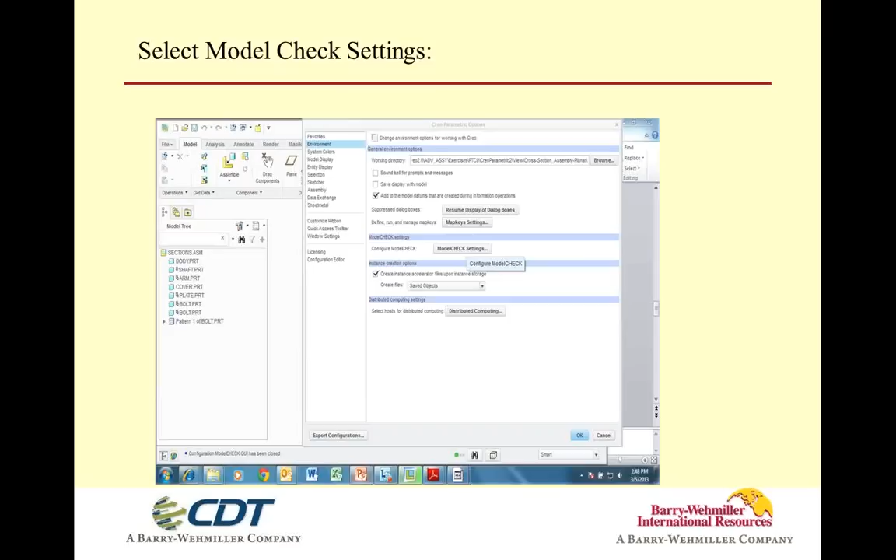Back in the days when I started off, which was about Rev 4, Rev 5, we had to pay for ModelCHECK, and it came into fruition in production build about Rev 9, and that cost about $10,000 to $12,000 - quite expensive for one license. So now it's free, and what I like to do is promote this side of it because it is a wonderful tool to check things such as the models.

And what I'm talking about is the integrity of the models. First of all, are there buried features? Are there features within features? Are there misspellings in words? So those are some of the things that you can actually do.

You can even take a look and see if the constraint to an assembly is correct or not. It looks at all three kinds of conditions: the drawing, the part, and the assembly. And because a parent-child relationship exists, you can get ModelCHECK to actually report these.

We have what we call an MCC file, and a configuration file that we have to set up. Those files are what ModelCHECK actually operates from relative to its characteristics. Understanding some of the rule checks and how to actually launch this is something I want to get into relative to ModelCHECK itself, so these are some really interesting things we're going to cover.

Jump over here into the PowerPoint to get into where the actual conditions are. So we're looking at where the ModelCHECK settings are in Creo 2. Now in Creo 1 and below, we have a totally different configuration setting. It's kind of in a pull-down bar in one of the tabs, and you can see it.

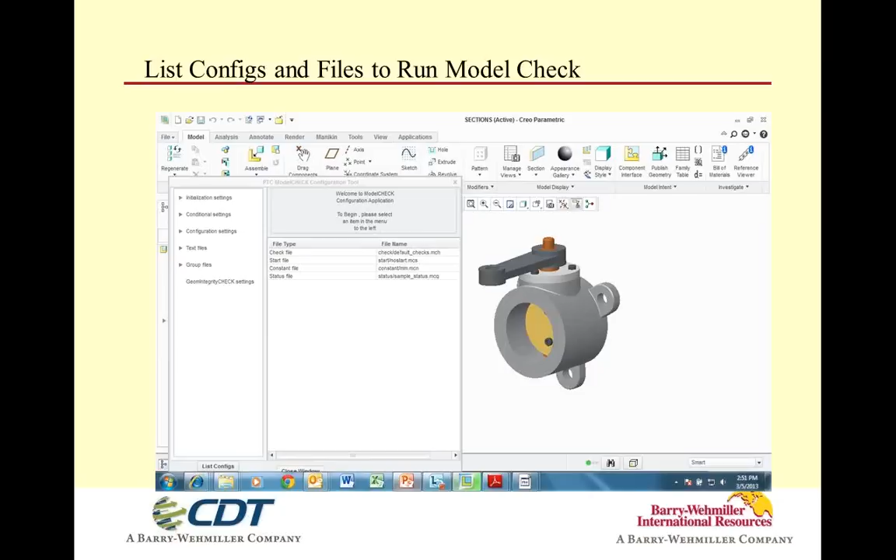And then we're going to actually run like this. Take a look at this. As you can see, we have initial settings. This is what they call the config.init file for ModelCHECK. So you're going to have certain conditional checks.

You're going to have a check for the start file, a check for a constant file, maybe a library or whatever, and you can check whether it's millimeters or inches you're looking at for units, and some basic things there.

And then we get into conditional settings and configuration settings, text files, group files, and geometry checks. What I mean by geometry checks is like circular references, or a buried feature where you have a hole within a hole. That's considered a buried feature, so you avoid machining errors when you go into the manufacturing world.

I highly recommend using ModelCHECK on both the manufacturing side when the model goes into manufacturing, and also when I check it back into my PDM system. So those are some of the things I really like to see.

The other thing I really like to do is use ModelCHECK for my analysis people, because one of the things you can do is check for material. You can check to make sure the mass properties have been filled out properly, and you can get into a lot of those characteristics that should be set up front with your start part, start assembly file, or start drawing file.

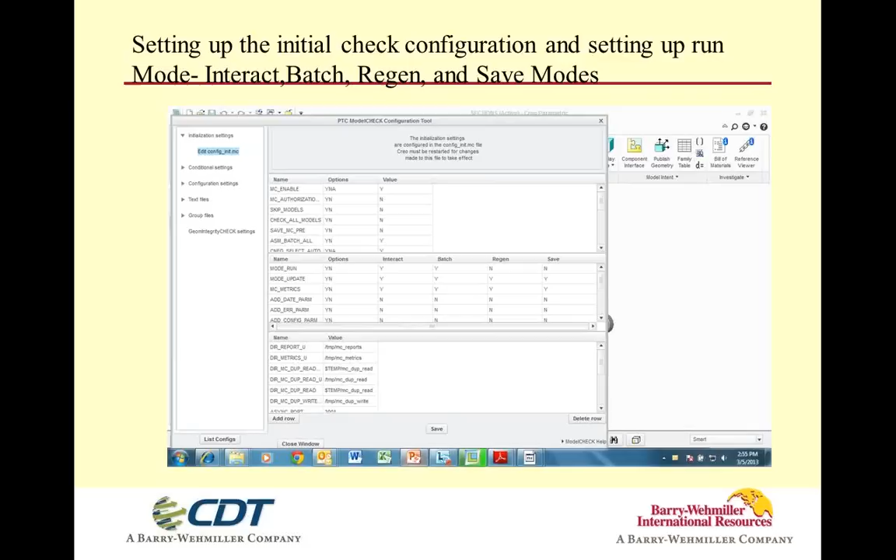And this is something that's free to everyone. Today when I walk into a company, I don't see many people saying 'oh hey, I'm running ModelCHECK and finding errors, I've got buried features in it.' You just don't see it, it's just not set up. So I thought it would be a great topic for discussion today in this webinar, because it's free. It used to cost us big money, so I highly promote it, and it's lovely.

If you ever want to get into some mentoring on why things are happening or what the situation is - can I check for this? I've got a whole long list of these parameters, and then some that are not even published, that you can actually check for. So these are some of the things that we like to do.

When I get back in here, you've got basically modes of action - you've got interact, which is this mode right here, and you've got batch. Let me talk a little bit about interact. It's called interaction, meaning it'll actually check as I'm regenerating and moving through that particular file. So it's kind of working with me as I'm building that model up.

And if I run across anything that is not a corporate standard - this is where I really like ModelCHECK - because I can incorporate a company standard to check for this in ModelCHECK and either error for it, warn for it, and actually report it.

So why would I want to report this? Well, one of the big things that happens is you have a PDM system called Windchill, and you can take the amount of errors that you see within ModelCHECK and report it back to the PDM system so you can maintain it by username or by user number and see what the performance is. So when you have a total list of what you'd like to see in your standards, when you create these parts, your vendors know you've got good parts to begin with.

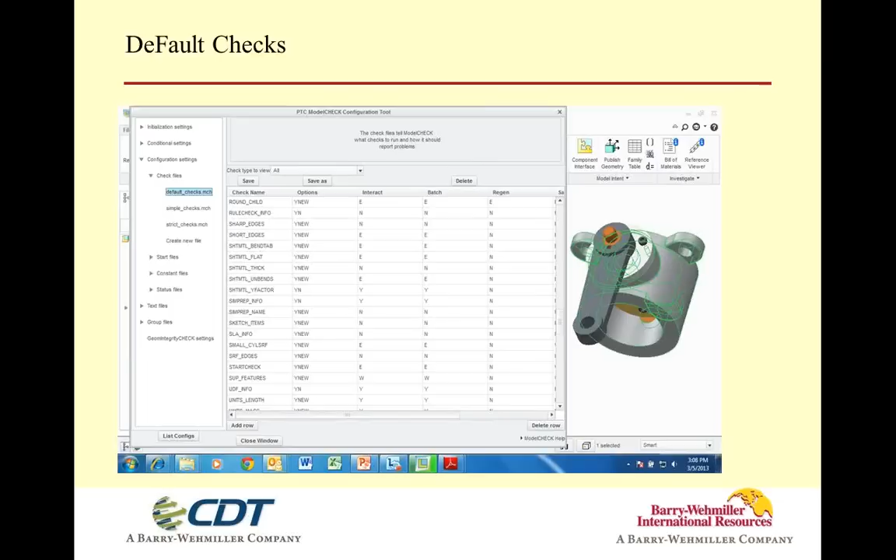So you've got some rule conditions that a true CAD administrator would actually set and express upon the organization so that we could maintain good geometry all the way through. And the whole idea behind ModelCHECK is to make sure that you have good geometry.

In my years of administration and training, I find that as you move forward with your models, the more problems and errors you see, usually it equates to extra time that has to be added to that particular model. So this is a great way of overcoming that, and it's a relatively quick check.

I would say for the most part, you're looking at something like 150, 250 assemblies, as long as you have about 10 or 12 checks, maybe taking 15 to 20 seconds. That's just a good thing, and then it reports back to you. So these are some of the things that you can get into.

One of the big things I like to do is not just check for library parts, I like to see all my library notes. So I have 01, 02, 03, 04, 05, so that those notes themselves are checked by ModelCHECK. This way we can make sure there are no errors, nobody's overridden anything or accidentally changed something, so that when we release it, it's 100%.

And you catch a lot of spelling errors. When I initially did a lot of this work, we had basically 10 checks. We checked for buried features, circular references, spelling, part accuracy, and whether it was metric or English. We also did some other checks for things like username, department, and so on. So you can use these parameters to actually do it.

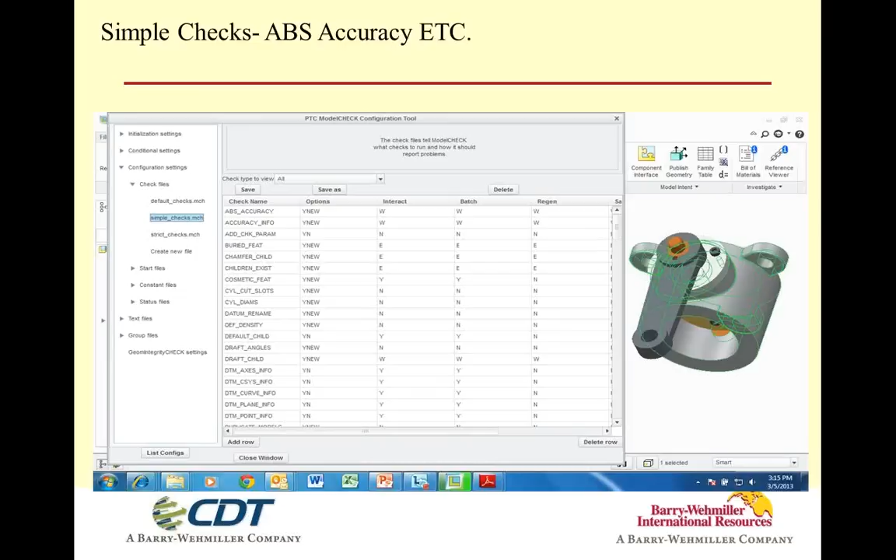0.0012 is my standard default in regards to the way that the software is actually set up from PTC. Now, I can range that. I can change that part accuracy. And when I change that part accuracy, it can range from, say, 0.0012 to 0.00004 or 0.0005, and that's the unit.

Those things are actually getting to the point of where it's getting accurate. Now, what I like to set this at is a range from 0.0005 to 0.0012. Now, if you're going to interface with another CAD software like CATIA or maybe NX or whatever, you can actually change that to make those ranges.

Now, I can tell you from experience, any accuracy below 0.0005 can have problems with file size growing. So as you start to increase the accuracy, or decrease the number of that unit, it starts growing that file size pretty substantially between 0.0005 and 0.0004, and what you'll find is it's almost exponential as you drop it for every unit. It's kind of interesting how that actually works.

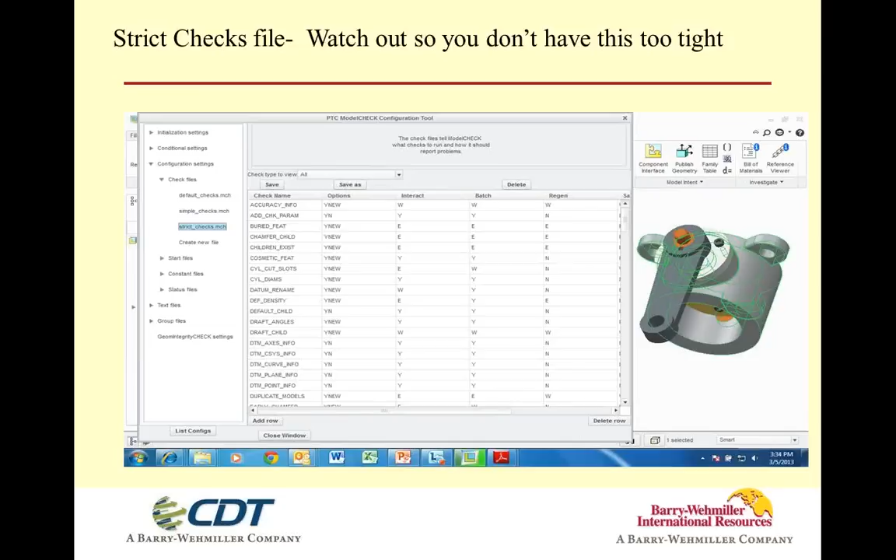We've got some things in here where we can actually look for cosmetic features. So we can say, yes, we want to report that in interactive mode, or maybe we don't want to in regeneration mode, and we only want to look at it in batch. So this is something that's a little bit different and gives you flexibility within that.

Something like a cosmetic thread would be a cosmetic feature. Do I want to error for it or warn for it? Probably not. But do I want to report it? Yes, just to say, look, you have a cosmetic thread here. Is this truly what you want? Does this match maybe a standard that we have? Maybe you've got some thread standards, or maybe some weldments that actually have to coincide with that. So these are some of the things that it looks at.

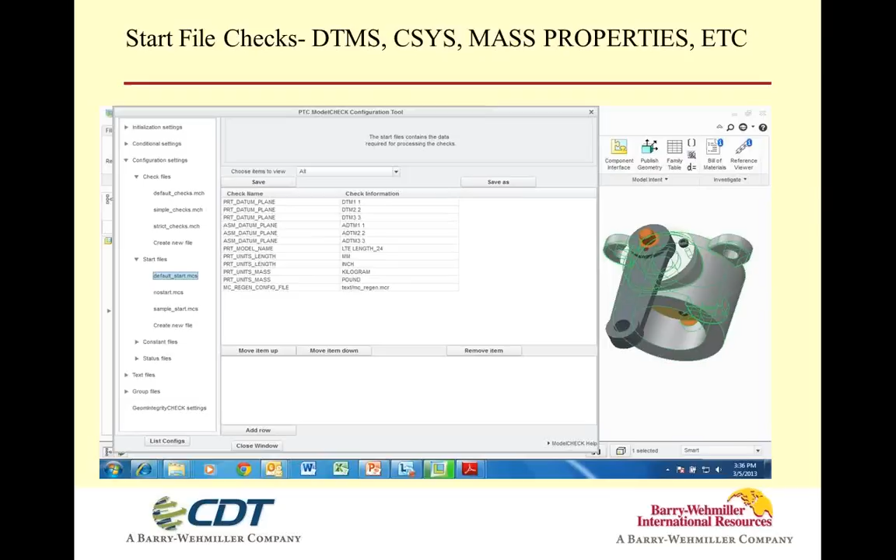Datum and coordinate systems, here again, these are informational. You can just report them or not, and so on. So these are some of the things that we can set up in our simple check.

Now there's strict checks and simple checks, so let me talk about each. When I look at default checks, those are pretty much system driven. When I look at a simple check, these are checks that I'm going to check based upon things.

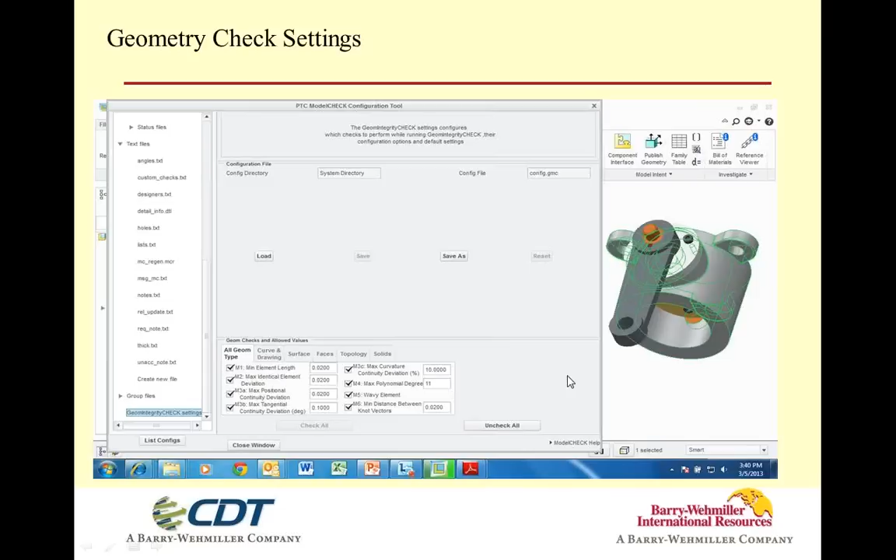For instance, like a buried feature. As you can see here, I've got it set up so that if I run it in interactive, I've got it set to error, to error, to error, and to error. So all of them are set: interact, batch, regeneration - and say if I see a buried feature, it's going to error for it. And so those are some of the things that get set up in that particular file.

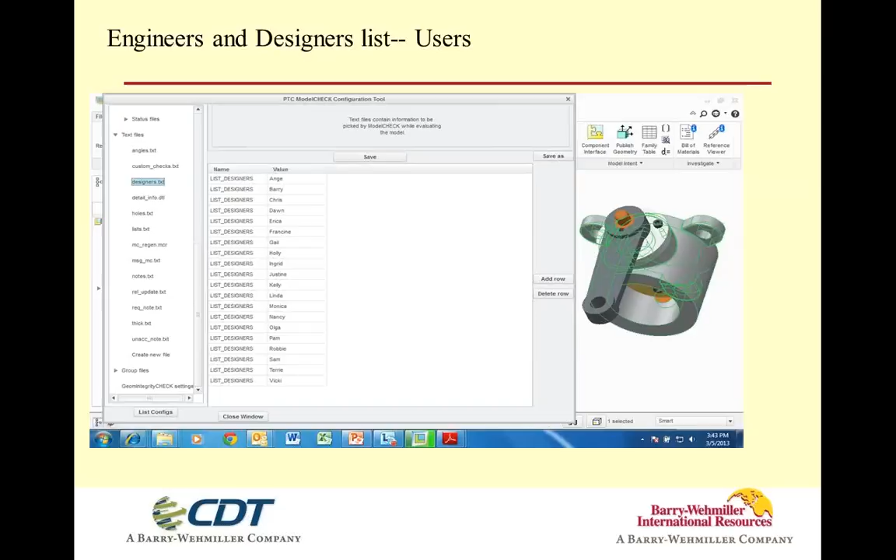If we get into what we call a strict check, this is something that absolutely can't be checked into a database because it's an error and we don't want it in there. So these are where more of your strict checks come in - like draft checks, maybe something like a buried feature - and you can say, look, these are musts. In the simple check, yeah, we'll let some things slide. But in the strict checks, we can say, look, this is what we've got to actually have.

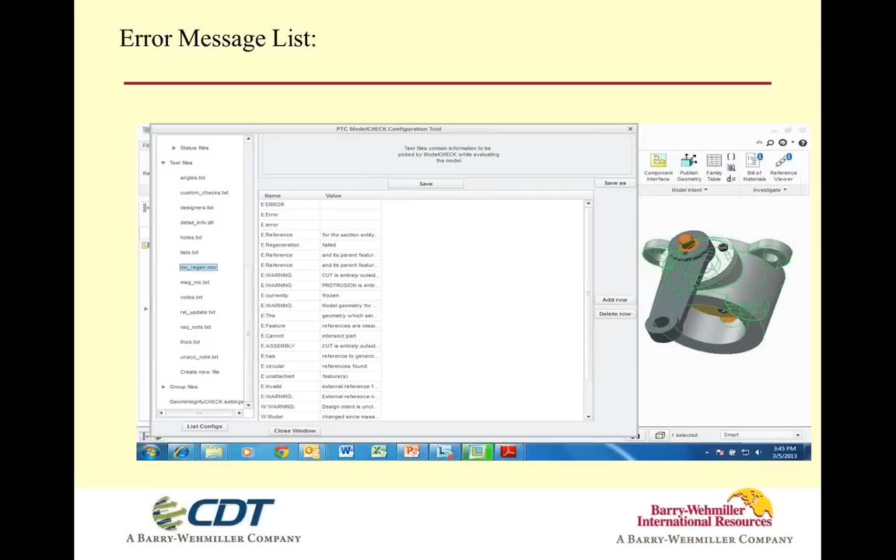Or maybe you take and eliminate simple checks and strict checks and create your own check. Maybe you have only 5 or 6 or 7 different things that you want to start with first, and then every month or so add 2 more, 3 more, 4 more, whatever. You'll find out after a year you'll actually have probably about 20 or 25 checks.

And what you'll find is your models start to regenerate faster, and people start to say to you, I don't know what we're doing, but boy, our models have really gotten good, and we can really do our jobs quicker. And they really get to the point where the regeneration process becomes more streamlined. And so these are some of the things that you look at.

Now, I'm not saying that you set every one of these to its finest. These are some of the things that can happen to us. We can look at something like in the start file - we're going to look at the datum plane, DTM1, DTM2, DTM3, assembly 1, 2, and 3. Maybe we've got something like a model name that we need to check, whether it's in metric or in inches. These are just some simple checks that we can look at in the start files themselves.

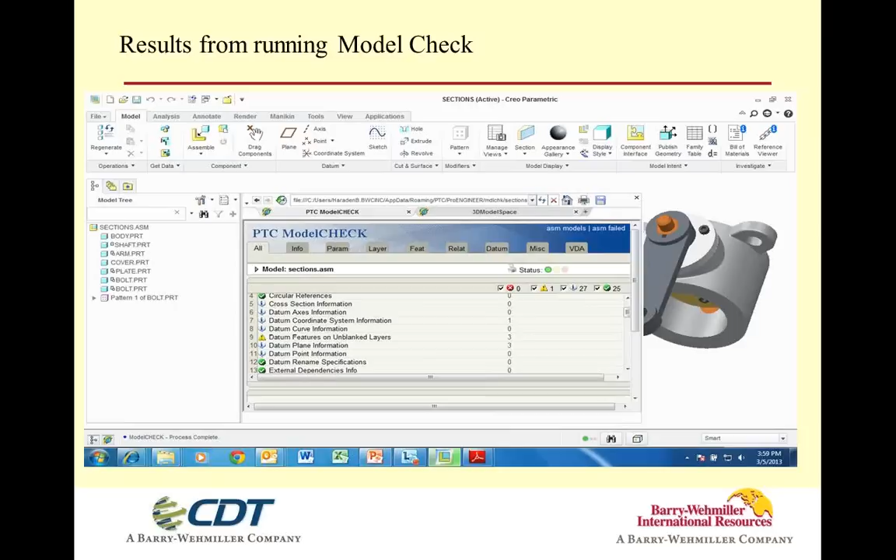Now, if they don't have them, we can either error for it, warn for it, report it, or no report - it's up to you where you want to set these. It takes a little bit to get the configuration. I do have a file that I typically like to start with, and then I start adding from there. Those are some of the things I've done throughout my years of working with ModelCHECK.

When we also look at geom checks, we can look at things like the elements, and some of the identical characteristics of how that model is - whether it's got any extraneous surfaces, whether the curves are okay or not - and we can set these values however we want. As you can see here, there's a screen down here that'll take this. We can load it, or we can save it as and make something totally different. So these are some of the things that we can look at.

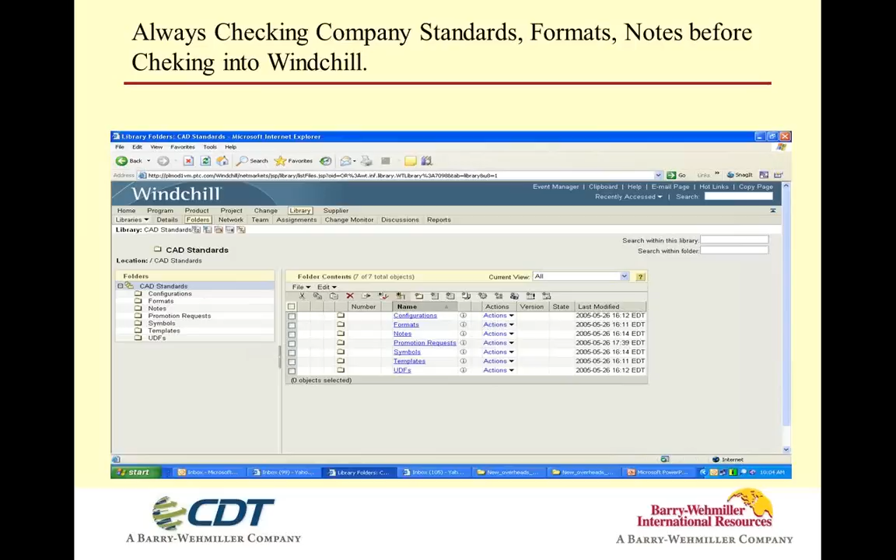When we look at designers, we can have all our users listed. In this particular case, I was just thinking about all the different people's names here, and you can put it in there however you want. I'm a big fan - I don't like to actually use a name. I'll use a number if I'm in a large corporation, since it really starts to restrict a lot of things that are going on. So I'm not so much a name person, but maybe that's the way you want to set it up, and that's fine. Smaller organizations are great to work with names because you know everybody. So again, it's totally up to you how you want to set that up.

Some of the errors - so when I report something as an error, I can say, okay, this is what the value is going to be when I see an error for an assembly, or an error for a part or a reference that's missing or whatever, so I can actually define what that value is going to be.

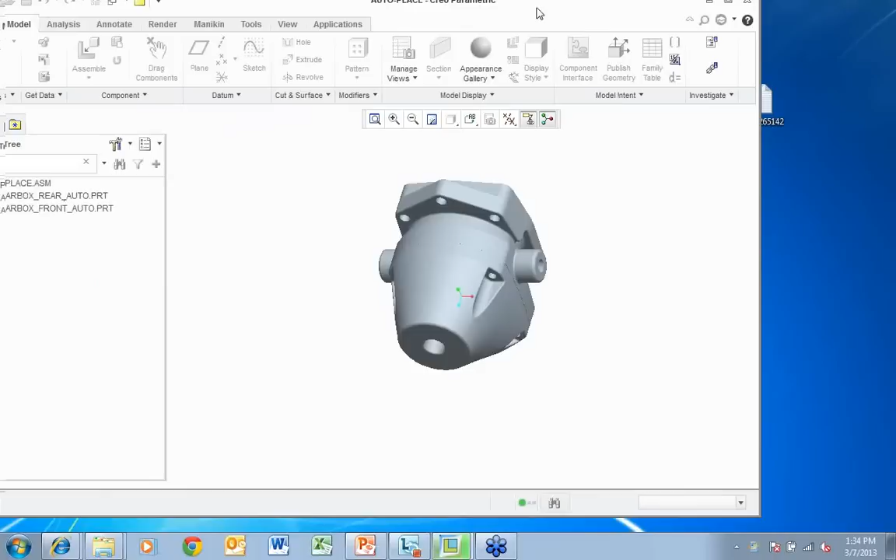I can also get into what we call running the model check, and that's where the rubber actually meets the road. As you can see here, we have an interactive screen that shows our warnings, which is the datum curves on an unblanked layer. Maybe we've got some datum features, like planes or axes or whatever, that are not on a layer. So we have 3 of them, and it reports the quantity of how many are actually in existence. That's most likely something you probably want to warn for, because it might be in your start part where you have the 3 datum planes, and that's why that's doing that. So these are some of the things that you can look at.

Then you get into some of the information - across the top here we have all info, parameters, layers, features, and relationships. That's a good thing - if I want something in a relationship, and I want to check that relationship and make sure it's always verified, can I do that? The answer is yes, I can do that through ModelCHECK, to make sure that relationship is always maintained and works based upon those features that I have. Datum planes or datum axes, all those can be reported. Maybe you have something set as miscellaneous, maybe some tools or whatever, and then of course the geometry itself comes into play there. So those are some of the things that you'll actually see and be in place.

Also, when you look at things like Windchill, it can automatically go out and check this model check before you check it into something - maybe you put a new format in, maybe you put a new note in. As you can see here, I've got a whole list of things that I would put within my library - maybe I have formats, maybe I have configuration. Configuration - well, I could have a ModelCHECK configuration, or I could have a Creo 2 configuration.

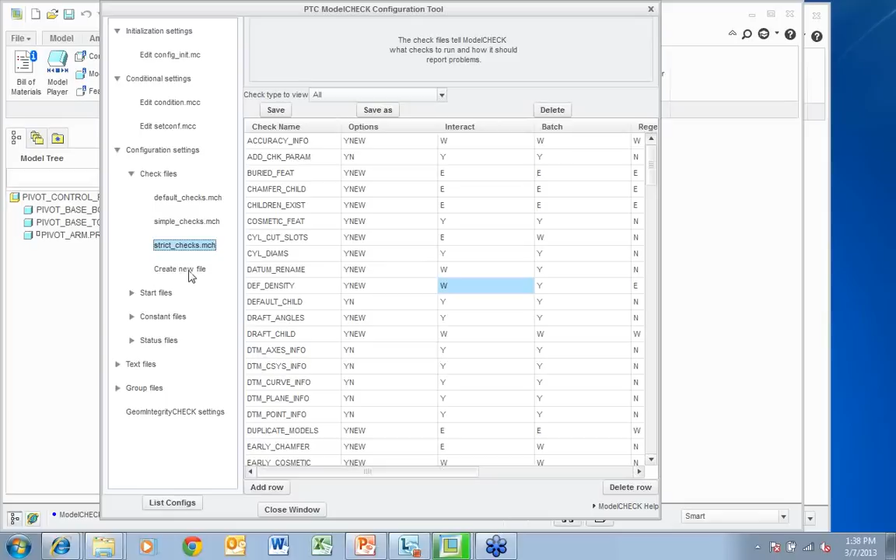And as I go through this, you can see that it's truly live, and you can set whatever you want. If I go in here, notice the fact I can go yes or no, and I can change that. And I can go over here, and I can change that to yes or no. Or maybe I want to do something totally different. So some of these parameters have yes-no type conditions, so we can see what we want to actually do for each one of these.

Maybe we go up into something like this, and maybe we want to take a look at that one. So this is where we want yes, no, and then we get into the A, which might be something where it's going to go out and actually take us through something called a website that actually fixes this particular problem. So these are some of the things that you can actually do and get into.

If you look at this one here, we've got yes, no, and then design and something. So we get some parameters here that are actually different that we have here in those types of conditions.

If I go into the conditions, where I'm going to the conditional setting, notice the fact that I can say yes, I want to check for inches. If I don't, I can uncheck it. And the same thing holds true here for medium, light, and so on. So I'm going into some of these conditions.

So I want to change. Then I'm going to go into the check file, and I can actually check some of these files. And I can say, okay, let's take a look at our simple. Well, now that I've actually got this set up here, I can go through and look at buried features. So I can say yes or no for reporting error or warning. So those are the options that I actually have.

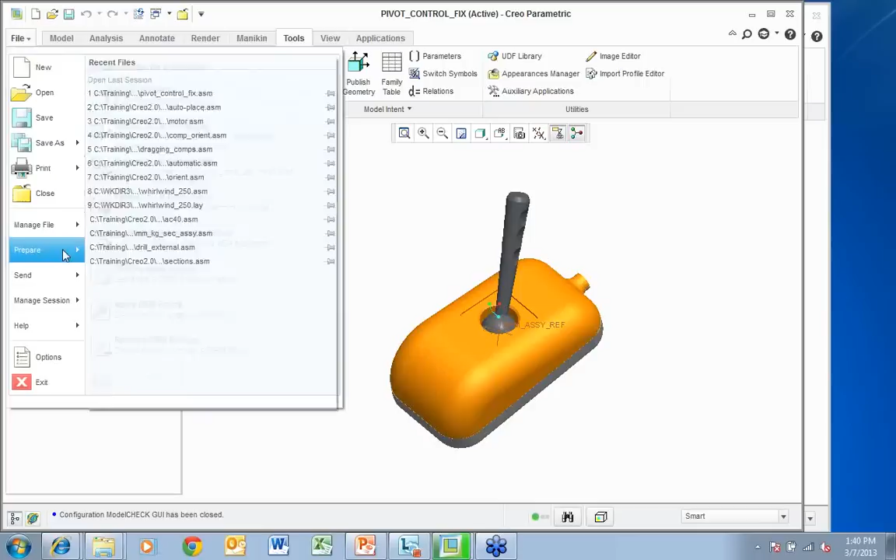If I'm just launching the software for the first time, be real careful of putting E's for errors there. Something like a buried feature or something like that, you may or may not want to actually initially set up. Long term, I'm sure you want to actually error for it, but just so it doesn't degrade the whole entire engineering community, you can actually set this up to be quite nice, and it reports very nicely in regards to each one of these files.

So with that being said, we can go in. I'm not going to say those, kind of get into some of the conditions.

So default density, do I want error for it? Do I want to warn for it? In this case here, I probably want to warn for it and take a look at it. Maybe you have something totally different.

So these are something. If I wanted to create a new file, I can create a new file if I want to take a look at that. So these are some of the things that you can actually do. And then once you get into that, then you can actually save that.

We can get into the start file. So the start files themselves. So what do we look at here? Well, we're going to look at what's going on with our sample start. So these are the parameters that it's going to report from our start, and these have all got to be filled out.

Maybe you've got the top view, the front view, and some of these planes, but we have no start. Notice the only thing in MCV generation configuration file, it's got only one there. And then if we want to create a sample, we can actually do whatever we want.

We can get into things like the text too as well. So we can get into the text file, look at some things like customization of it, or maybe we can get into, maybe we want to see what all my designers are. So I've got a list here called list_designers, and I just put it all there as generic. So these are some of the things that we can actually do and get into.

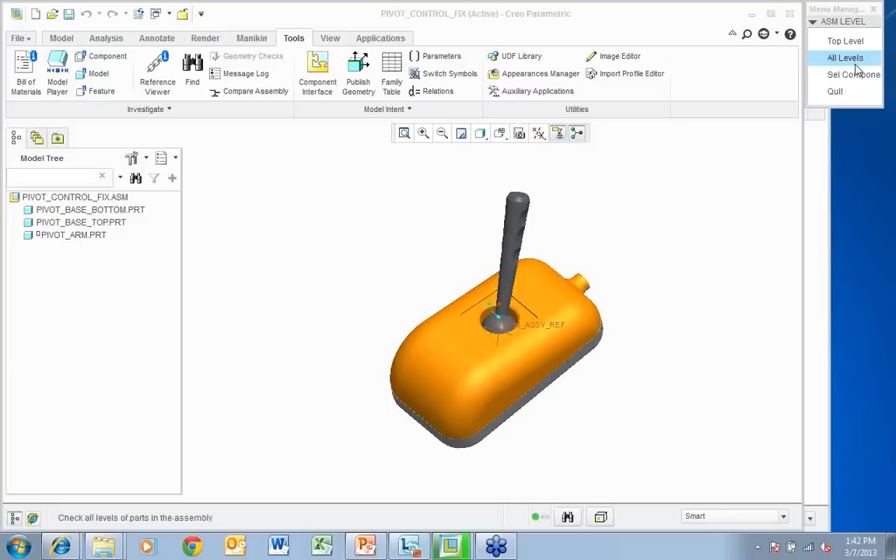We can get into angle text. So this is the values that we want to see within our angles, these are acceptable values. Maybe we got a holes text, and these are the holes that we have that we'll check for when we actually create a true hole in our model tree. So when our model tree says hole, it'll check to make sure that these values are in existence.

Getting into MC regen, so here again, these are the errors, and then this is the list of some of the coordinate systems and some of the conditions that you actually have. So these are some of the things that you can look at and get into.

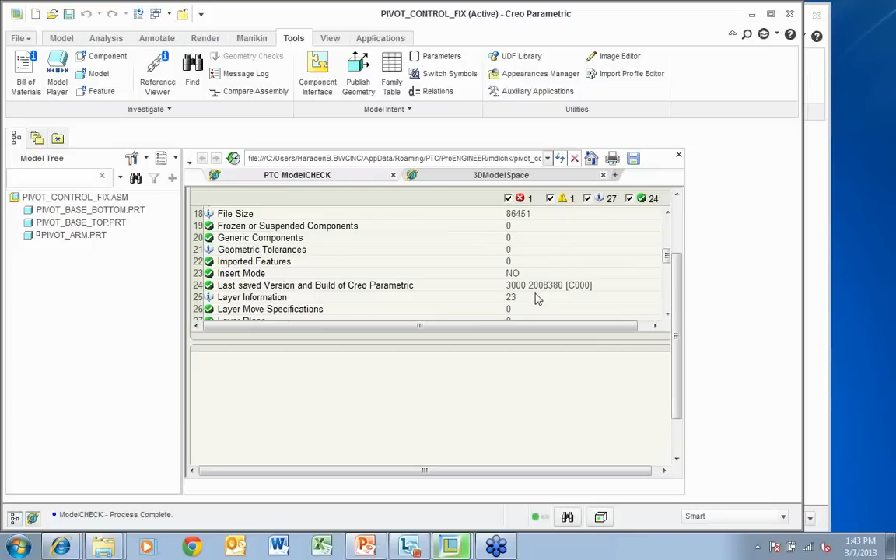Maybe I've got something that's thickness. So these are my ranges of thicknesses in millimeters or in inches. So I can define a lot of these things. And last but not least is this geom check. You can see that we have minimum length of any and identical element deviation. So we can look at those kinds of, what are the continuity of deviation, and set some of these if you want to in that particular situation.

So these are some of the things that you'll actually see within the ModelCHECK. And then, of course, you can close the window and you can say, do I close it? Yes, I do. Now, one of the big things I can do is I can come over here and launch ModelCHECK and see what happens.

In this case here, since I'm going to do it, I'm going to do this as interactive. And then if I go over here, there is like what you see, all levels, top level. So this means by interactive, I can call upon it at any time and run. It's not going to run for me automatically because I'm not hitting regenerate and I'm not hitting save. When I hit those two types of conditions, if I had those set, then it'll actually run ModelCHECK and it'll report. In this case here, I'm using interactive, so it's called upon.

And this is where I like to actually start off with it first, because you want your users to use it, not get to the point where they become overreactive and say, hey, I don't want to use this again, it's just too tight. So use it for a more positive condition than the negative side. That's been mine, and when you actually have that in position, it works great. It works lovely, and you'll see more benefits to it than anything else.

And I can tell you, in my past, from Harley, from Volvo, from Deere, from all the rest of them, I can tell you that in those types of conditions, when you're using ModelCHECK, I've usually seen at least a 50%, sometimes even a 60 or 70% increase. I know that in the Volvo world, we were close to about 80 to 82% increase because of using ModelCHECK. Plus, we ran two CAD systems under one roof. We not only ran the PTC products, but we also ran CATIA, and so we had to interface back and forth.

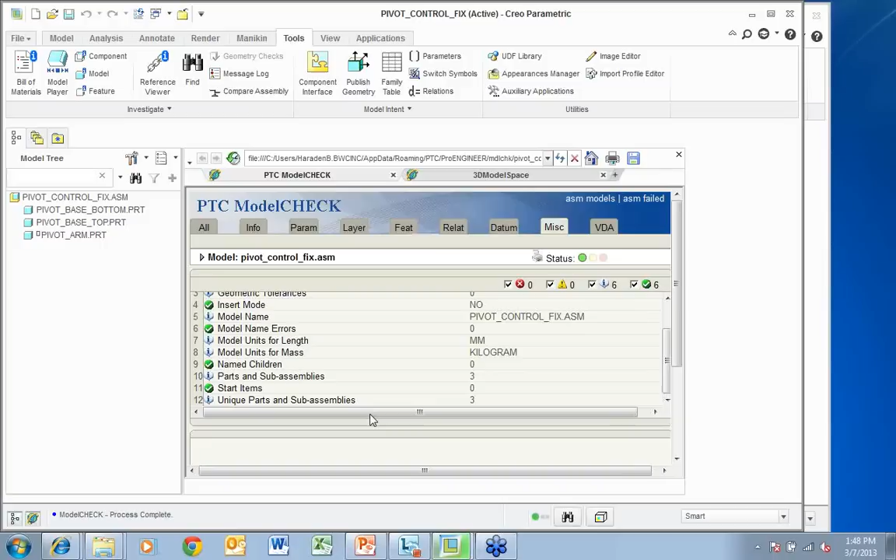This is something extremely neat for Creo 2, and this is what I love most of all, because now I can take the model and change the color, and now I can see exactly where my problems are in reference to that. So these can actually highlight no matter how this looks. If I want to do it cyan or whatever, I can go ahead and use that reference or whatever the case may be.

So these are some of the things that we actually have. If I go under the Info tab, notice it's got some more information in regards to that. So this is all related to info. Bulk items, I got 0 bulk items.

And I got a bill of material, I got 4 bills of material that I have to combine with. So these are some of the things that I know. Now what are the parameters? Well, I've got missing parameters, none. Parameters of errors, none. But I've got some information, and there are 3 information.

And if I select that, these are something that actually goes on, and you can actually see what those are. Now let's double back to that actual reporting section. It's kind of neat how this actually works back and forth.

Layers, same way. So I can say, okay, I've got some existing layers and everything else that's going on in this particular case. These are some of the things that we actually have.

We can also get into things like features. So there's a datum feature. We've got a datum feature unblanked in layers. And then we've got some named features. Well, this is a result of maybe an issue of spelling or whatever, and there's only about 57 or some of those actually following under our standards, but 14% that may not.

So we've got suppressed features. If I take and suppress one of these, now there's nothing here that's suppressed, so I don't have to take and expand my model tree, I can actually see it. Relationships, if there's any relations - and what I'm talking about is mathematical relationships, the whole geometry.